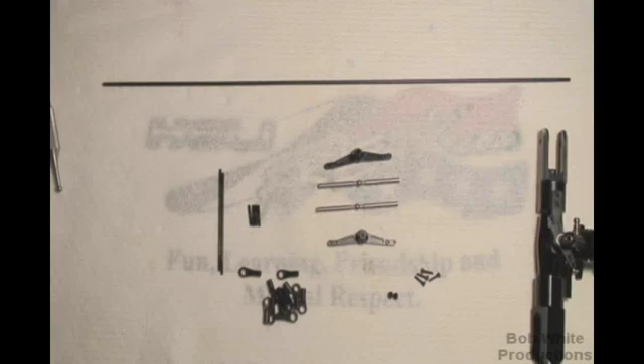Okay, on to the rest of the head build. Now, like I said, I jumped steps. I went ahead and put the grips on first, simply for video reasons. Now I'm going to go back to page 2, and we're going to do the fly bar cage, fly bar, etc.

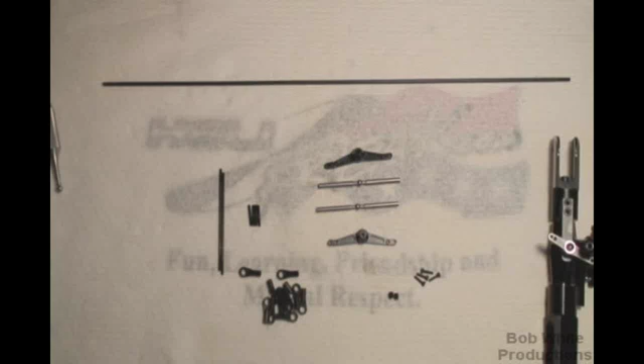Go ahead and get those parts out. Now, it's a couple of bags out of that big head bag. Bear with me here, remember we're working out of this one bag here, with the paddles in it and everything. We haven't opened any other bag, and by the way, great packaging, making sure you're not having to jump around.

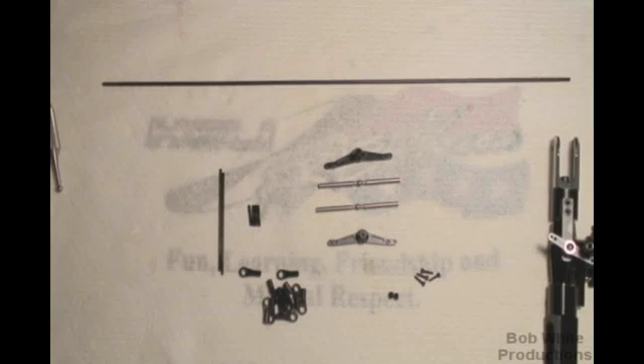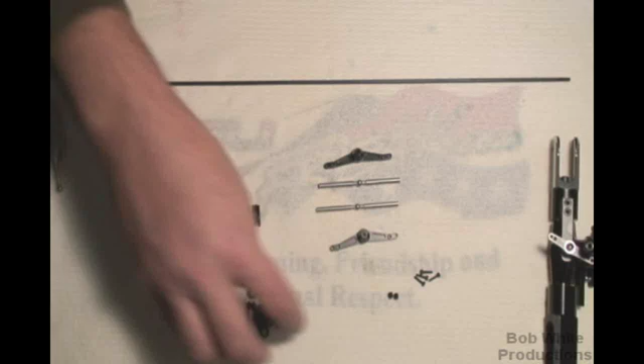Anyway, so you're going to get the fly bar cage out. In another little pouch is the screws that hold the fly bar cage together, the set screws, a link set, and there's a bunch of links in there. There's 4 short rods, all the same length - these are the 15 millimeter rods - and there's 2 long rods. We can set those aside for now. Get your fly bar out, and then we're going to go ahead and assemble the cage.

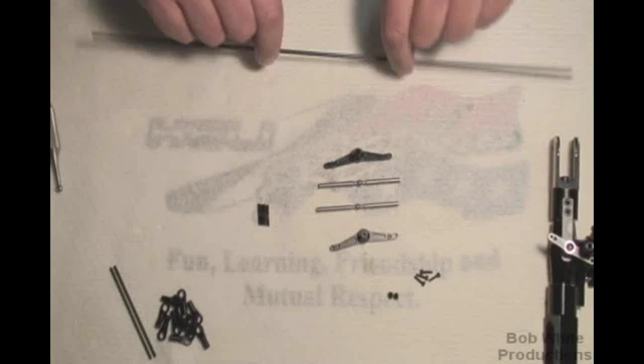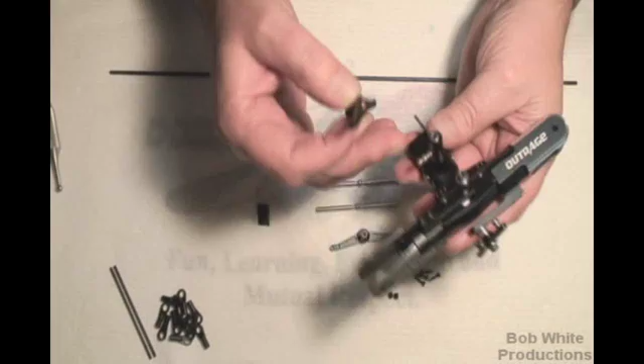Now, notice on this fly bar cage there's an arc to it, okay? That is specifically so Outrage Design makes a lower head between the seesaw and the grips, and that arc down allows the seesaw to travel farther. If you put that upside down, you're going to have a problem. Just remember the set screw will face up toward the top of the head when you build this cage.

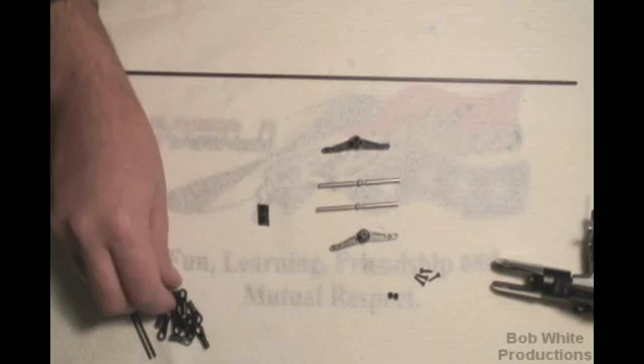All right, however, before we assemble this, we need to get a set of links built because we have to have links on the cage before we bolt the cage all together. Now, the manual doesn't say this. Let me zoom in here. The manual doesn't say this, but these links are not unidirectional.

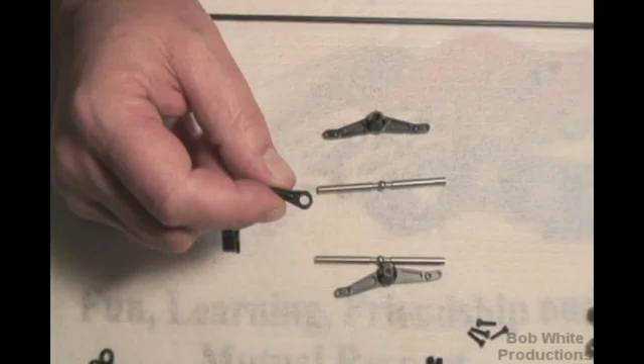If you look close, the links show a ring on one side and not on the other side - it's flat. You'll also notice, on this flat side, that the diameter of the ball hole is smaller than the diameter of the hole on this side. These are not universal links.

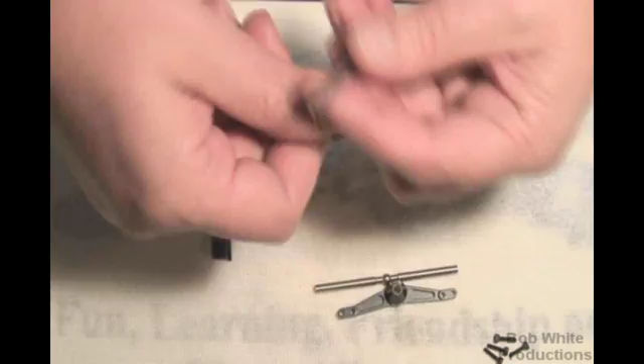The link with the ring on it will go on the ball first, okay? So let me just put that on real quick. Ball link pliers - actually, ball link pliers won't work on these because you can't get on them, so you got to press them on easy. I want to see how tight the links are. Yeah, that's way too tight.

So you're going to need a ball link sizing tool to size the links before you assemble this. All right, so what we need to do is go ahead and get 4 of these links out. We need to make up a set of links.

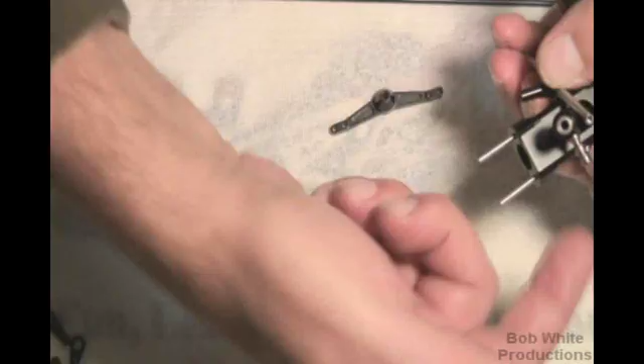And also I'm going to talk about the fact that when the seesaw cage is together, you want to make sure that the link that's going to go on the washout is the right orientation, so you're not making a twist and putting them on opposite. So one will go one way, one will go the other. I'll talk about that when we get them built.

But we want one facing one way, one facing the other in relation to the washout. Anyway, we need to size these links, so let's get sizing.

Let's get out 2 of the 15 millimeter rods. Now, how long the link should be is based on - if you look, it says go look at page 6 of the manual. Let me go wide here now.

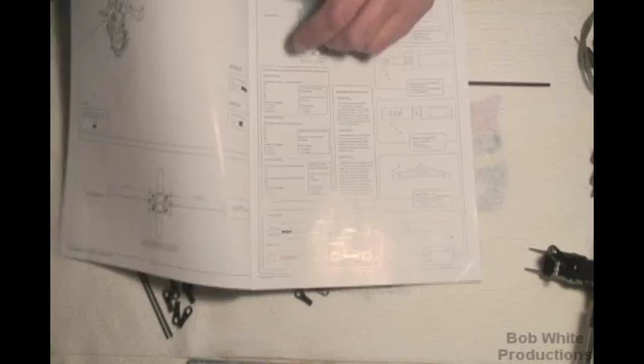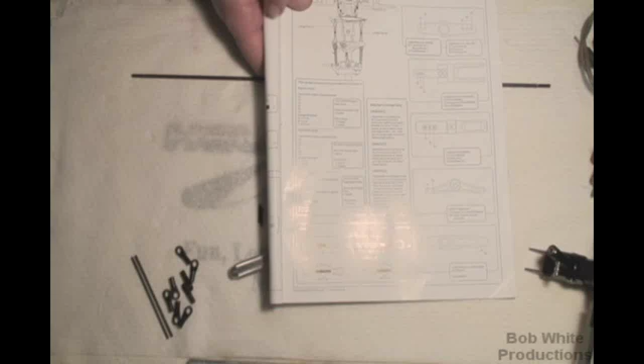Go look at page 6 of the manual to determine your link lengths. So this link that we're building here is called link B, all right? And then you go to this page, and here, based on your settings and whatnot, it gives you different link lengths, which is pretty cool actually, depending on where your balls are on your head. As I told you, depending on where you put them, the links may be different. But for B, it will always be the same.

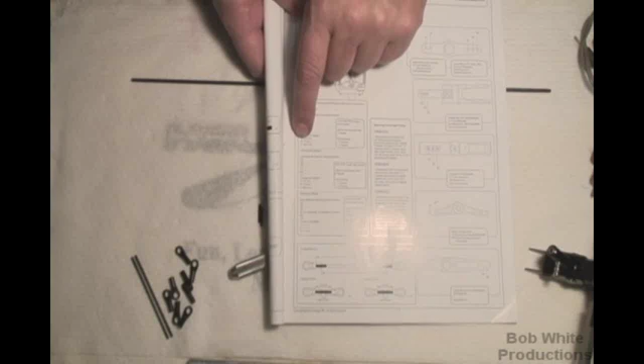So you go over and you look up link B - and hold on, where is it? Yeah, link B. On all 3 of these, no matter where you have them, link B is a 1.5 millimeter gap here. All right, so I hope that makes sense.

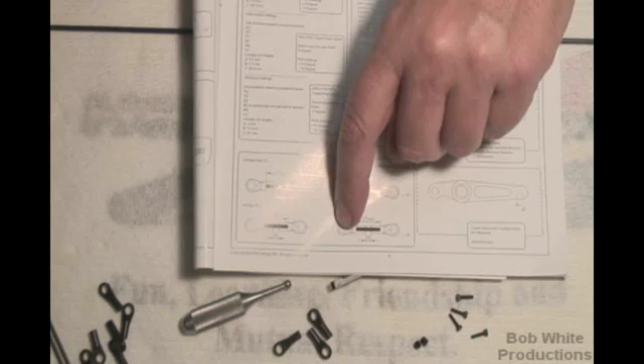So not very difficult - the gap between the base of the links, not this time between the center hole, but between the base of the links for link B, doesn't matter what you selected for ball placement, it's going to be 1.5, all right? So we're going to make those up and get those links ready, and then when I come back, I'll talk about getting them on in the right orientation. All right, so let's get those links made up with the 1.5 spacing, and we'll continue on.

Okay, so there we go, I made my links up. Now, actually, let me take one off here - I should have probably shown you this. What I do is, even though I measure that 1.5 gap, plastic molding varies.

So what I do is I use a set of calipers. I put a set of balls on my calipers so I can just put them on there, make sure they're identical. It's important these are identical lengths, okay? Let me widen up a little bit. So you want to make sure they're identical. You can always adjust them later, but when you do, you want to adjust them the same.

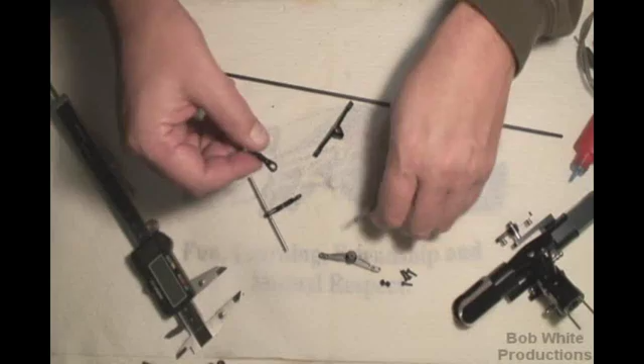All right, since you can't use ball link pliers, remember, now when you build these links, put the ring and ring, where they'll go on the ball, on the same side, all right? If you don't do this right and you have to make a half twist, then they're not going to be the same length, all right?

So then go ahead, and since you can't use ball link pliers, carefully put that on the ball. Now I had to size these links quite a bit, and I mean quite a bit. They were very tight, so don't think you can build this helicopter without a ball link sizing tool. You're going to need one, that's just a matter of fact. Now when we build this cage, what we're going to do is...

For instance, I'm building this cage, ring, all right, so that, and then this side will be ring facing the other way. Once it's built, it doesn't matter which way I go, ring will be that way.

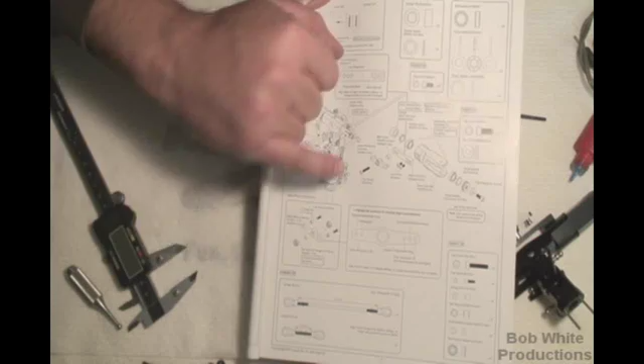Now if you look at the manual, you will see that the cage comes down to the washout side on this side of the head. So we want the ring here and the ring here to be on the same side, because we want that larger opening to go on the washout arm. Make sure you get that in the right orientation when you build these.

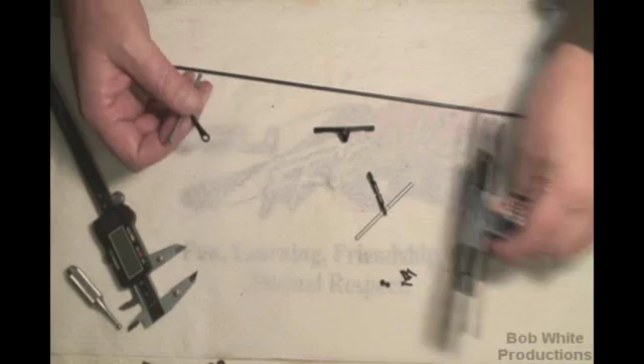So there's my ring. If I was building the head like so, I would put the flybar cage together like this, and I'd have ring, and then the same thing the other way, ring. So no matter which way I put this flybar cage, I'm correct. But remember, ring on one side, ring on the other. Don't flip it around the other way because that won't be right.

When you finally go to put your washout on, you'll find out the ball is not going to go on the washout arm in the same orientation. Anyway, I hope that makes sense.

So what I'm going to do now is put 2 screws with Loctite and put these 2 arms on one side of the flybar cage, making sure I've got it the way I want it. I've got the ring side of the links and the ring.

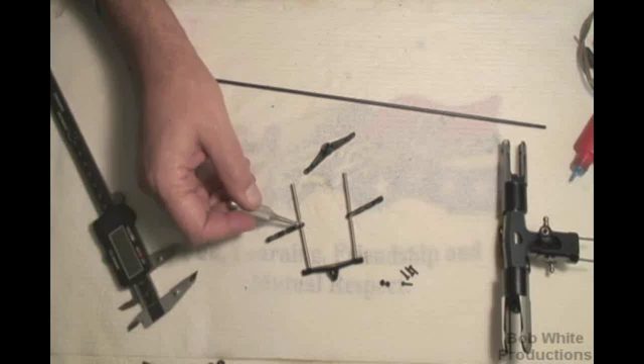Let me flip this over, flip it outside. Again, this is important so you don't have to do a half twist. So I've got the ring on this side, and the ring on this side, and of course this is the top of the helicopter. So make sure you got that right. Let's go ahead and get 2 screws in with Loctite.

We'll continue on. Okay, so we got this half of the flybar cage now. It's pretty easy to tighten these up.

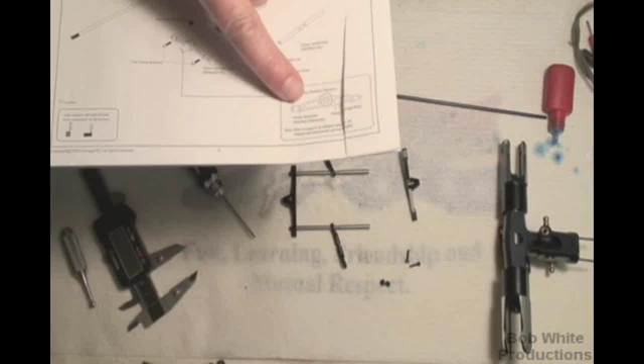Also, I didn't talk about something - there's 2 holes on the flybar cage, and as the manual shows, let me go back to that step since I had the link location. The inner hole is for faster response, outer hole for slower. I'm going for faster on the flybar cage, so I moved mine to the inside. If you're new and you're just learning, put them on the outside.

Another way to make sure you got the links on right is that ring I talked about - the head rotates clockwise, so just make sure these always face the clockwise direction. So ring on this side, ring on this side. Let me just double check that. Yep, that's correct. So ring on the clockwise facing side and ring on the clockwise facing side.

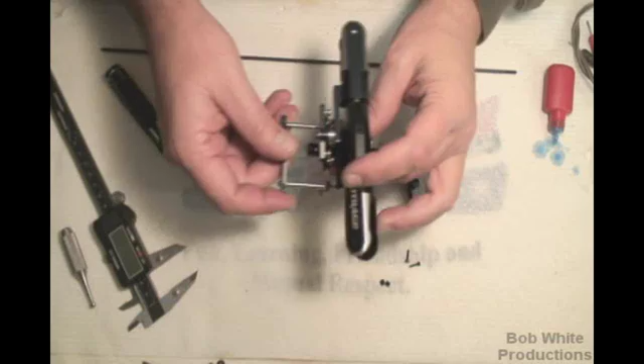Okay, so now what we're going to do is go ahead and kind of assemble this. You're going to put the cage on the seesaw, run the flybar through. Now remember, if you're doing this right, the set screw for the flybar cage will be upright. Let me feed this through. Don't worry about how far the flybar is now. Remember, this arc will be in this fashion with the head.

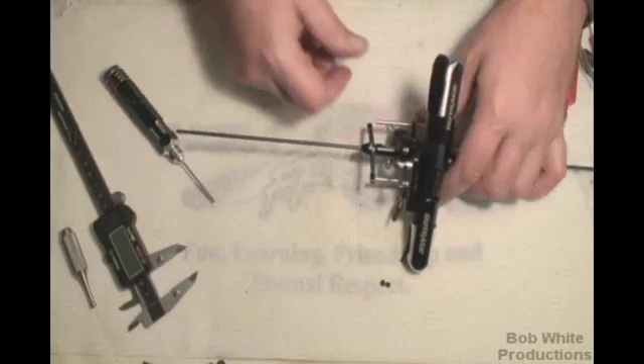Now what we're going to do is go ahead and put on the other half of the flybar cage and go ahead, put those 2 screws in and tighten them up. Now, one thing you want to do is make sure your flybar cage isn't twisted.

I've seen people actually do that. So when you bolt this all up, when you're all said and done, looking across this arc and this arc of the flybar cage, they should be parallel, not twisted to each other. So make sure you don't get them twisted.

Usually, if you tighten up one set, which was pretty easy to do just holding the rod, you go to put this one on, you'll be okay. But just double check, sight down that flybar cage and make sure they're parallel to each other and not twisted. Okay, let me get that other side on and we'll continue on.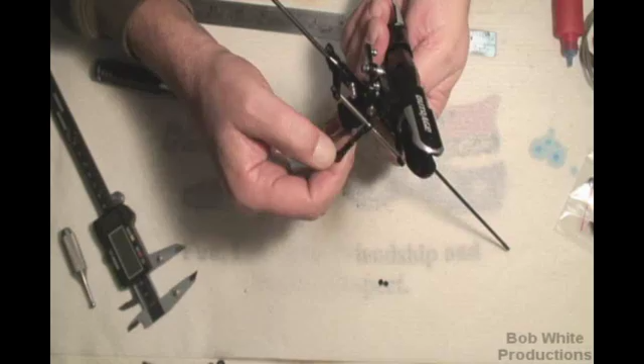Okay, so there we go, we got the flybar cage, and again, sight down it and make sure both sides of the cage are parallel. Again, make sure as the head rotates that you got the ring that goes to the washout on this side, ring facing the clockwise side.

All right, so then I went ahead and centered up my flybar. Now, so you know what I came up with - measuring from the tip of the cage to the end of the flybar was 154 millimeters on each side. Double check that - yep, 154 millimeters from the tip of the cage to the end of the flybar.

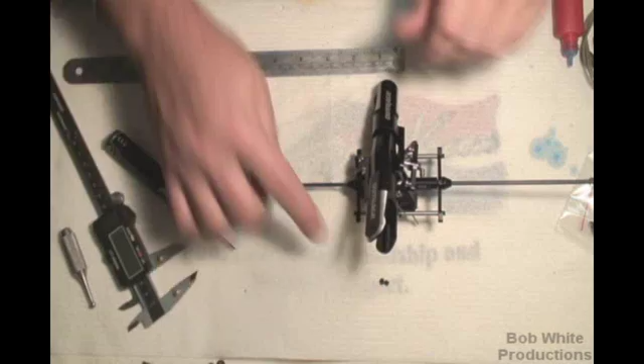At this point, go ahead, without moving the flybar, put your set screws in. Don't forget the Loctite. Get your flybar locked. Anyway, that will finish the seesaw, and we'll continue on.